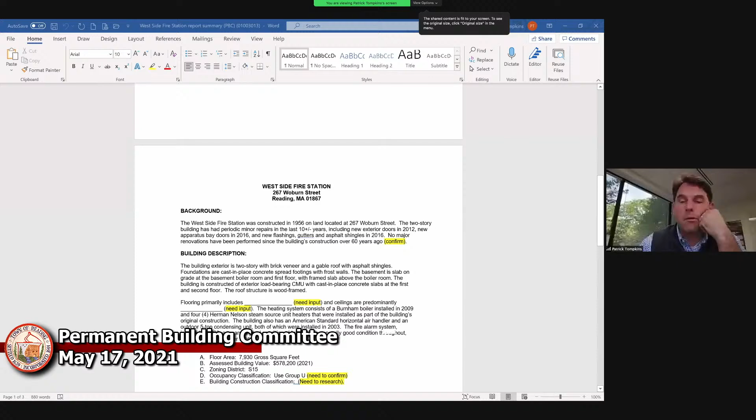Okay, I'll see if I can do the same. I think that's what we did the month before. Right. Bear with me a moment. Screen... sure I share the right screen. Okay, I have the narrative up. Can everyone see that? Yep.

All right, so the first page is pretty straightforward, and it's similar to the other narratives we've already read and approved, so I don't know if anyone needs to read through that. No. So moving down, I read through this ahead of time. I thought it was pretty well written and covered just about everything we wanted to cover.

There's probably just some sort of fact checking we need to do that we can do on the fly here. If anyone can open up the checklist or any other information while we go, or we can leave some stuff for later. I don't know if anyone else had a chance to read this ahead of time and confirm any of these.

Yeah, when I put this together, I was just using the notes because I wasn't actually there for the walkthrough. I had a mediation the next day, so I just did my best with the notes. And if I got anything wrong, certainly let me know. And then a couple of them, like the occupancy classification and the building construction classification, I just wasn't sure where to look for that, and I hadn't had a chance to find that information yet. So if anybody has any input or can point me in the right direction, I'm happy to close those loops. Okay.

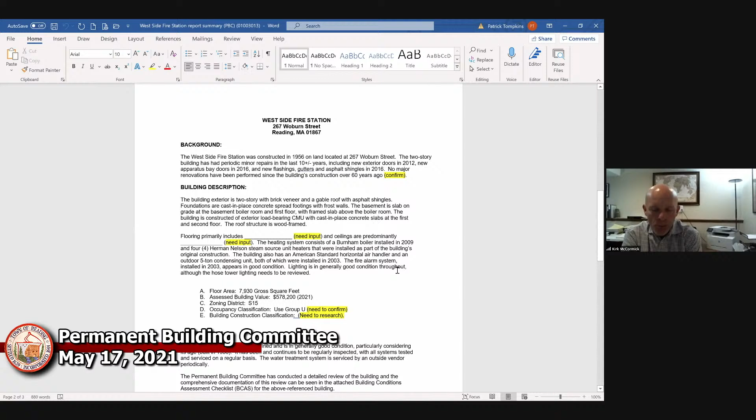So the first paragraph looks okay to me. I don't know if Joe and Kevin, if those recent renovations and things make sense to you.

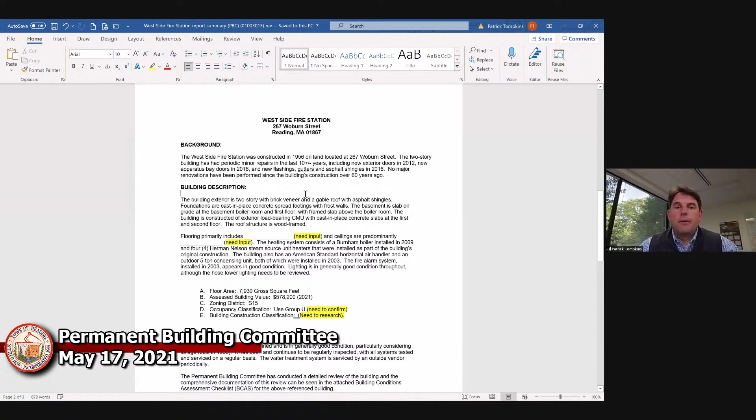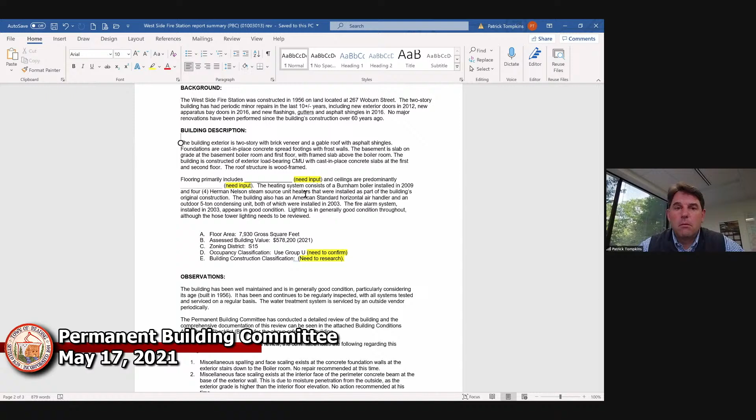Okay, just moving down to the building description. I don't recall what the primary flooring was, I think it was primarily resilient flooring, except for the apparatus bay, which is concrete. There was maybe some carpet in the upper floors. It's all VCT on the second floor, which was actually installed new in, was it '15, Joe? I mean, '16?

Might have lost Joe. It's the problem with these remote meetings.

So I don't know if anyone can read the edits that I put in as we went along. I think that pretty much covers it. There's definitely some ceramic tile in the bathrooms, but it's predominantly VCT. Those bunk rooms are all VCT, right? There's no carpet, and that was all replaced.

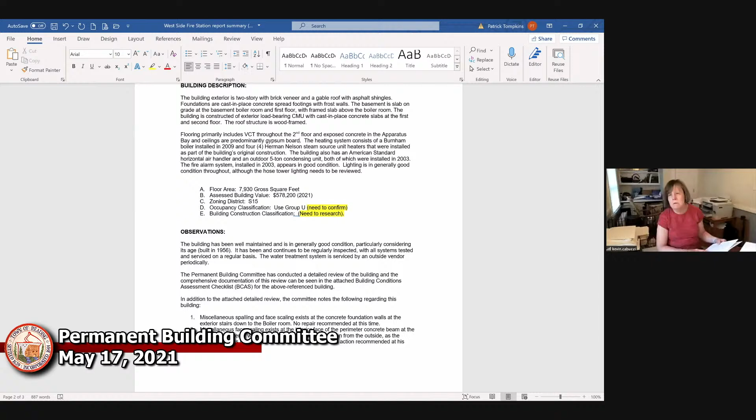I think it was '16 when there was the fire at the condo building there by the town hall. I'm drawing a blank on the name of it. It's the old high school building. Yeah, it happened around the same time. We had a flood on the second floor.

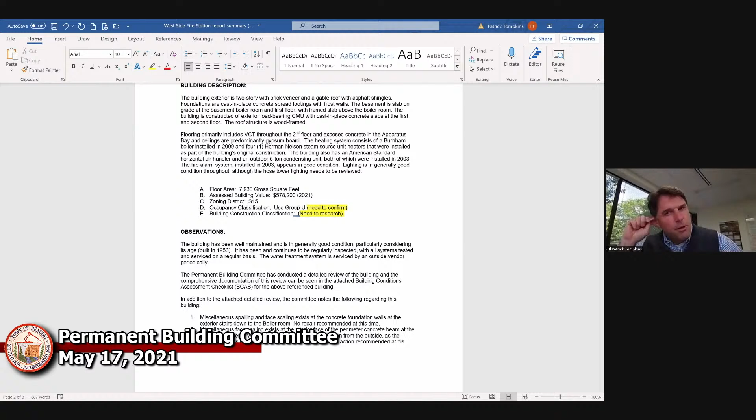Well, the ceiling's predominantly drywall. That's what I recall. Is that correct? That's correct. I believe so. I don't know if anyone else has any other comments on that paragraph.

As far as occupancy classification and building construction classification, we could kind of just do some research and circle back on that. I don't recall, if anyone has any comments on that paragraph. I don't think so.

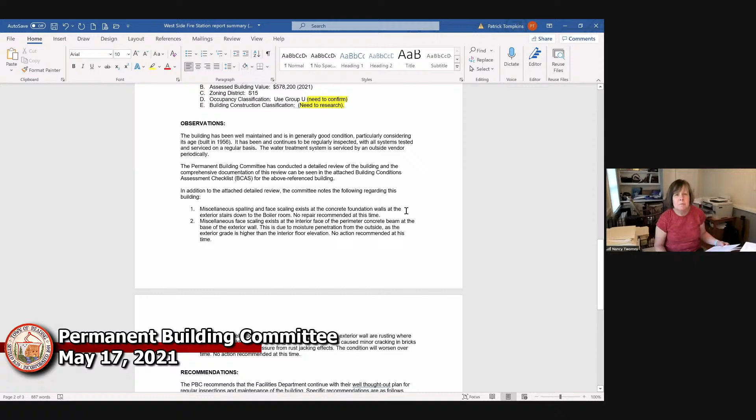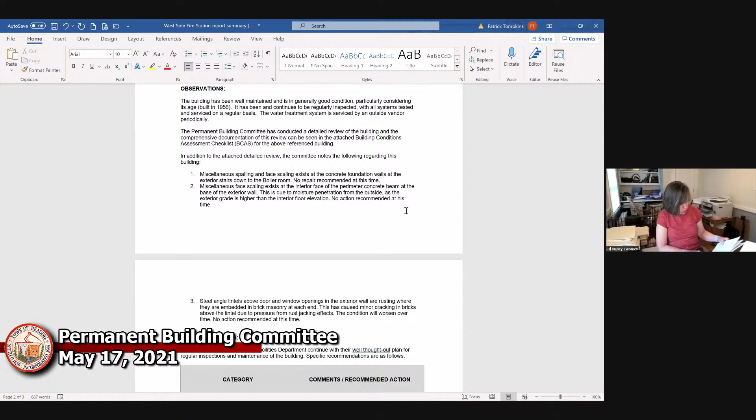Nancy, you could probably point Kirk. I'm looking for the occupancy classification. John can probably give us the building construction classification, but I'll look. Okay, if we come up with that before we close down, otherwise we'll just table it to someone to do that research and give it to Kirk or myself to finish this out. Or just tell me where to look. I just don't know where to look for it. Building code is where it is.

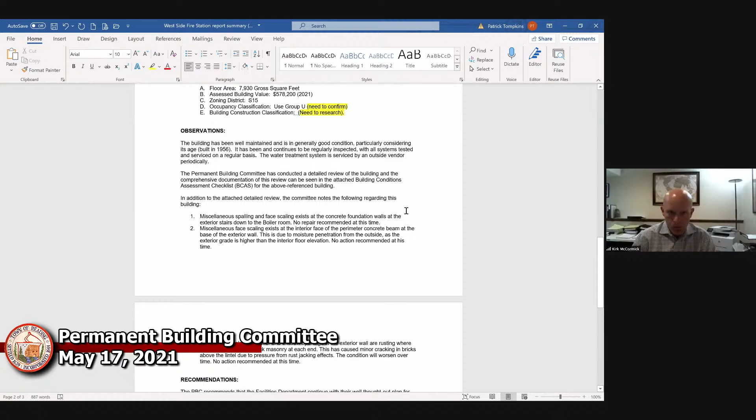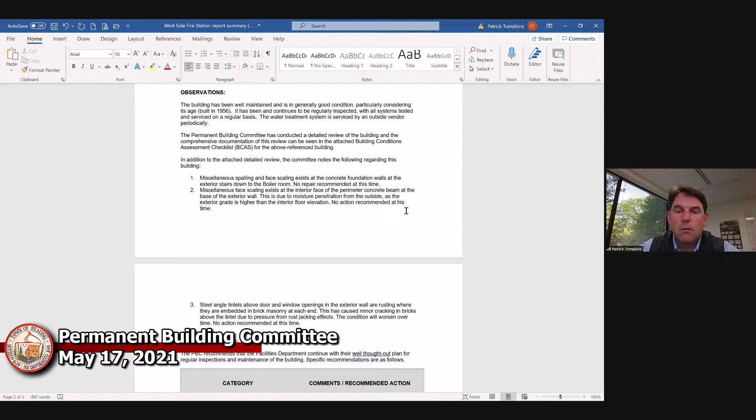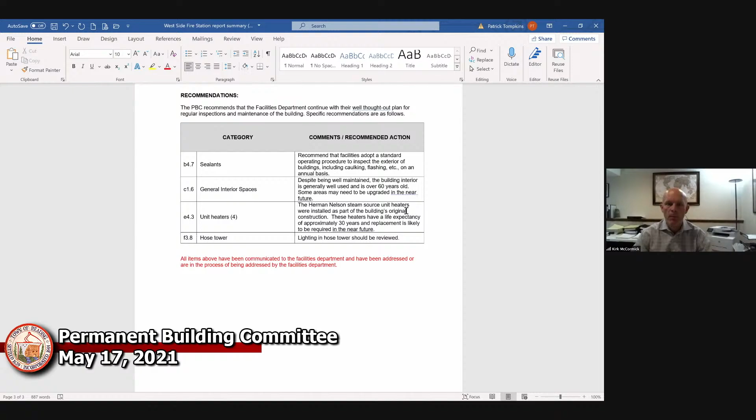All right, so we'll circle back on that, the observations. I don't know if anyone had any comments on the descriptions of the observations. I didn't have any changes or edits to the observations. Is everyone good with that? Silence will speak in the affirmative. And then the recommendations were just the items pulled off of the checklist, right? Right. So I don't think we need a vote or anything, but we'll just circle back at some point on the occupancy and the building construction classification.

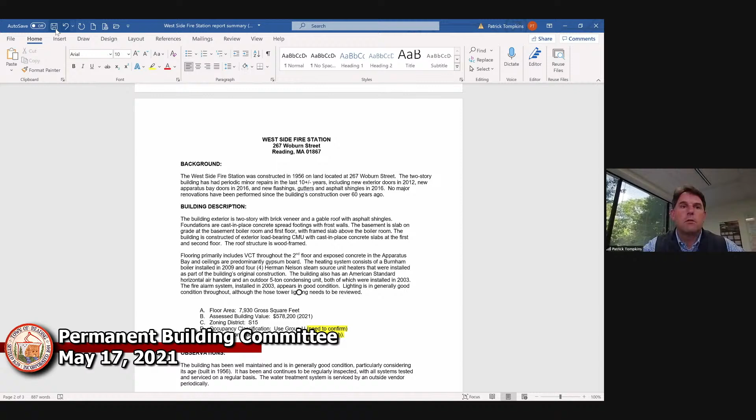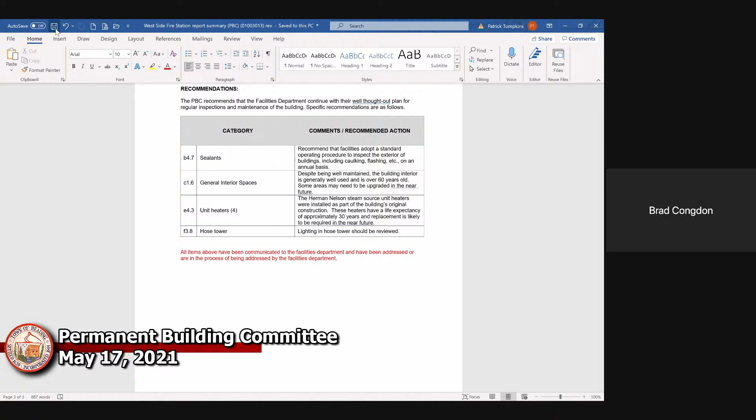Pat, as far as the actions, can you scroll down to those? Sure, sure. I don't know if Kevin or Joe have addressed any of these since we did the inspection. The first one's kind of a general one we use everywhere.

Well, our goal, one of our goals this year as a department is to put a sealant PM into School Dude, and we're going to have to bid that out to get someone to do that. We are going to be actively pursuing that this year, FY '22. So, second item.

I don't necessarily agree with number 2. That kitchen was completely renovated. Kev, when was that done up there? The kitchen was done in, it was like '12 or '13. It was completely done. And then again, when we had the incident there, it was during mutual aid coverage that was over there during that fire, and a faucet was left on and flooded that second floor.

We did all the flooring in there, which included a major abatement of the existing flooring because it was asbestos. And we also painted that place top to bottom.

I don't really see this item as actually belonging under the recommendations. Some of the areas I saw and recall, like the bathrooms, are 100% functional, but they're original to the building, like the tile and some of the fixtures. So it's tired, and we wanted to note that, but we didn't see anything that didn't function.

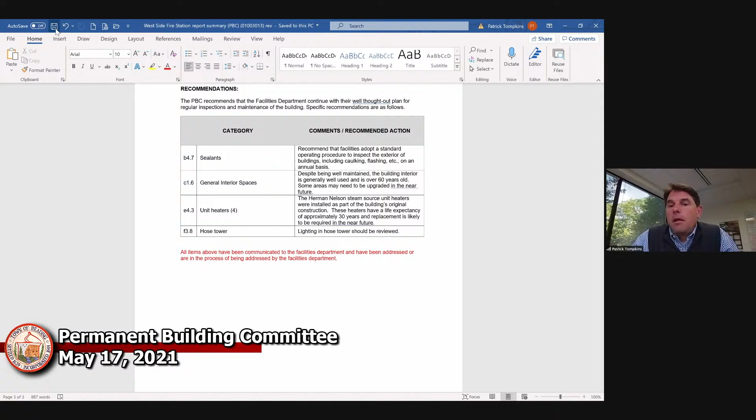I didn't see it as anything that we would recommend you need to do something. This was more from a capital planning perspective—at some point there probably needs to be some work. The building is, as far as we could tell, structurally sound, keeps the weather out, serves its purpose, and is functional and well maintained. But that was just something like the bathrooms had urinals that are probably original to the 1956 construction.

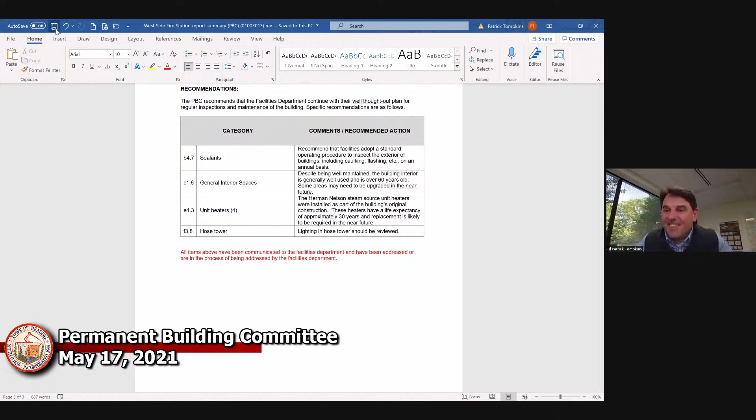And then as far as the unit heaters go, Kevin, any issues with those? No, they were all functioning. Yeah, we haven't had any problems with them.

Other thing to keep in mind, our capital plan is for any particular project that's over $10,000 in value. So if anything like one of those unit heaters was giving us trouble, we would take it out and replace that in our operating budget. So just keep that in mind—that's why you wouldn't probably see those unit heaters on the capital plan.

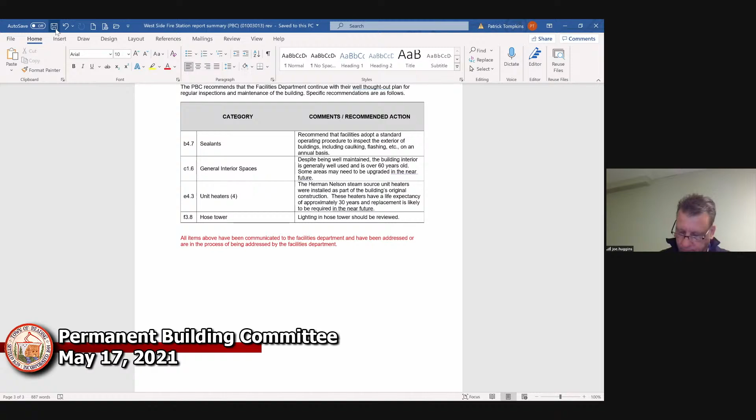Again, those are more things just to point out to make sure they're on your radar. The one thing that probably should be looked at is the lighting in the hose tower. That's probably worth looking at. Thank you, Brad, for pointing that out—we should make sure we're circling back to those items.

So Pat, on the use classification, it's actually mixed use. It has business B, it has a little bit of residential because they're sleeping there, and it has storage for the garage bays. So you could say mixed use B, R, and S, but I could get more specific on all of those.

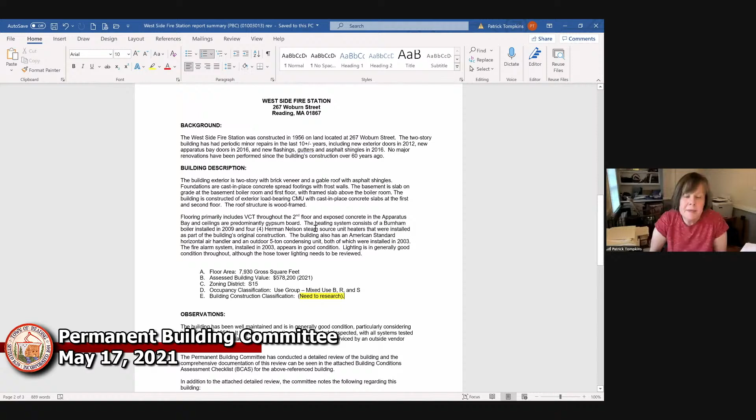All right, so we'll circle back on the building construction classification. Yeah, that I'm not sure. Does it have a big assembly space too? It has a big meeting room on the second floor that is open to the public. Yeah, I'll look at it and see—that might still be under B because it's probably educational use. Anyway, I'll double check. All right, so I'll save that.

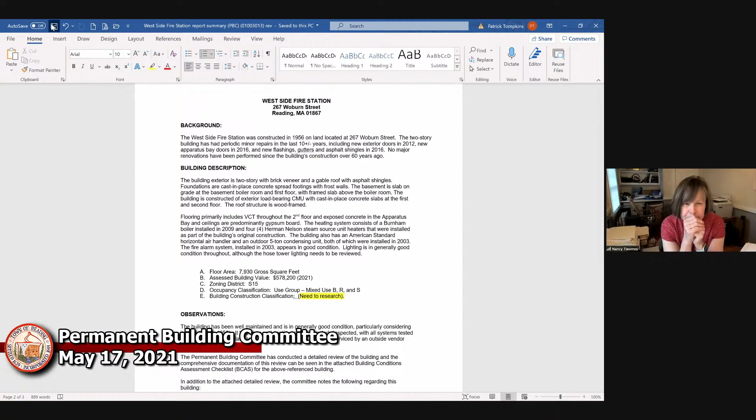The next item, and I know we've got everyone here for the water tower project, which I put at the end of the minutes because I know it'll probably take the longest time. But before we jump into that, Joe, nothing in particular, but could you give us a quick update on any ongoing facilities projects, and also if anything's been done on the MSBA submission.

So as far as the MSBA submission goes, it's due on June 25th, and the school department is preparing the SOI right now for the Killam project, if you will.

There were others—on the accelerated repair program, we were contemplating maybe putting in for the boilers at Parker Middle School, but because they're less than 25 years old, they don't meet the criteria. That also goes for the roof at Parker Middle School, which is a project we're looking at—we're going to go into design in the next few months and hopefully have that out to bid next year. But again, less than 25 years old, so we wouldn't even qualify.

So the big one is the SOI for Killam, and John Doherty has done a lot of that work. It was captured in the enrollment study and past SOIs we had done when we took advantage of the new roof over there. So we have a lot of the information through School Dude and other projects we've attempted to get invited in on. I believe it's a 6-month turnaround to hear if you get invited in. That's what we're hearing.

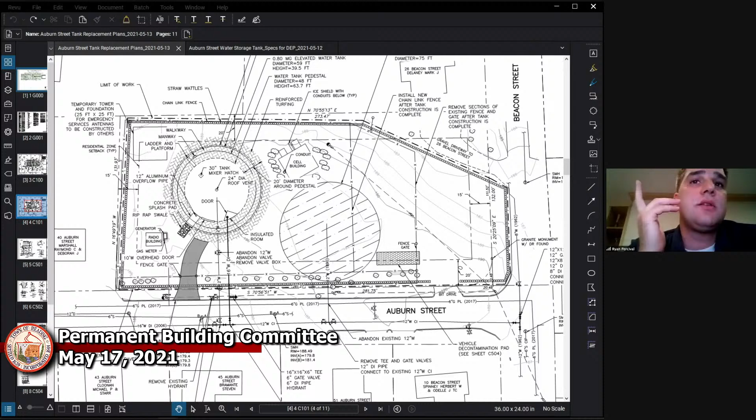We had a possibility of putting the antenna on the easterly side of the site. That was not well received during that conversation, and this is what the final decision led us to for the location for the RFP. So, ideally, I'd like to have the thing completely off-site, have more room, but that's not an option for us. So we will have to design it in such a fashion and construct it in such a fashion to take precautions for that.

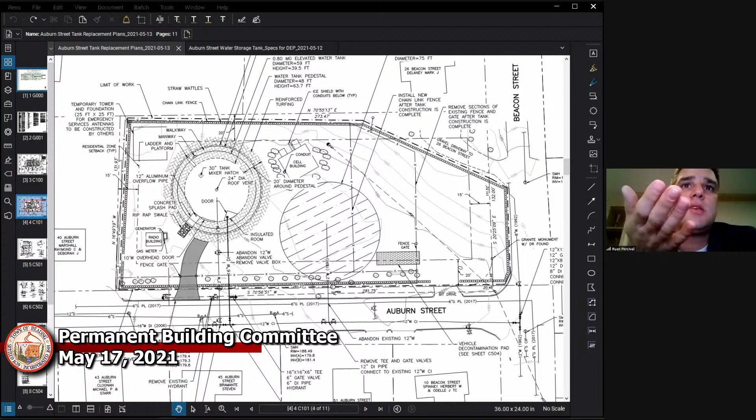Okay, I mean, I share your concerns. I just, you know, we are stuck to a shoebox size lot, and a lot of things going on at that site. Well, not really—it's not that small a lot. It is that small when you're looking at the construction of the site. We have a laydown area that takes up the diameter of the size of the tank because that's how big you need to have it for the pan. And then you have a large size crane on site also trying to move and pick that and put that in place. So it is a tight site.

It's not open by any means. Well, obviously Weston and Sampson are going to have to be fully aware of whatever limitations there will be in terms of excavating close to the ballasted foundation, and you may have to do some soil support. None of these decisions have been made in a bubble without consultation to Weston and Sampson and the carriers. Ideally there would have been some better locations if it wasn't on site, or as far off to the easterly side as possible, but that was rendered not ideal during the CPDC process. So this is what we're left with in the site that we have to manage.

Quick question on logistics and space on site. Where will the crane sit to hoist? Will it sit so, because you've got the laydown area, and then obviously you're gonna have to pick that and put it in its permanent location. We've had some conversations with tank constructors, and it can come in on their easterly side and get close to that laydown area, depending on the size crane they have. It could also possibly pick from the street. With the size crane they're using, I'm sure their reach will be big enough from the street.

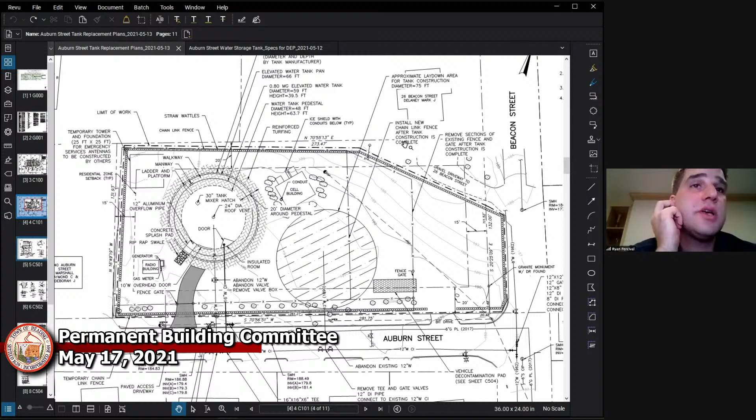Since it's entirely funded, paid for, and designed by the carriers, it was left open for their design on what they felt they could put in that footprint. I've put up a 150-foot tall monopole before, and we used either a 12 by 12 or a 15 by 15 foot concrete foundation, so it would take less footprint - you wouldn't be as large as 25 by 25.

I understand. When we were speccing this out for just the town's 911 equipment, we were going to use rock anchors and have a foundation, but we did not give them a design. So it quite possibly could be a ground foundation, rock anchored foundation - we don't know yet, we haven't received them.

Okay, thank you. Ryan, this is Greg. I guess, and it's too late at this point, but just to rephrase John's concerns differently: if whoever responded to the tower RFP knew the limits of the excavation for the water tank, they could design a foundation for the monopole that took into account the close proximity of that excavation. Instead, we have it going backwards, where we're going to allow the tower RFP respondent to build whatever foundation they want, because they don't know the constraints or limitations of the foundation design and construction methodology for the water tank foundation. So it's going a little backwards.

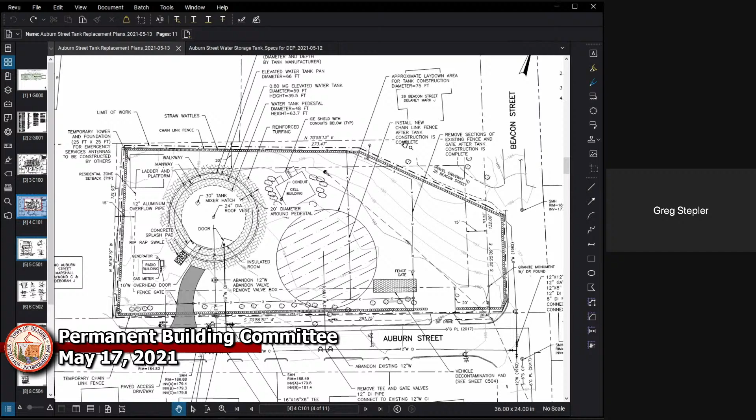You cut out, I think we might have lost you, Greg. We kind of missed the end there, Greg. Are you still with us?

So I think what he was saying, it's going a little bit backwards, tail wagging the dog. I don't know if there's anything, as we talk through this, if there's anything you want to include in that RFP.

You don't have the water tower foundation designed, but I think Weston and Sampson has a pretty good idea of what they expect the design to come back with. And if nothing else, we could make sure in the next week through an addenda that we communicate as much as humanly possible to whoever is responding to the RFP on the temporary tower.

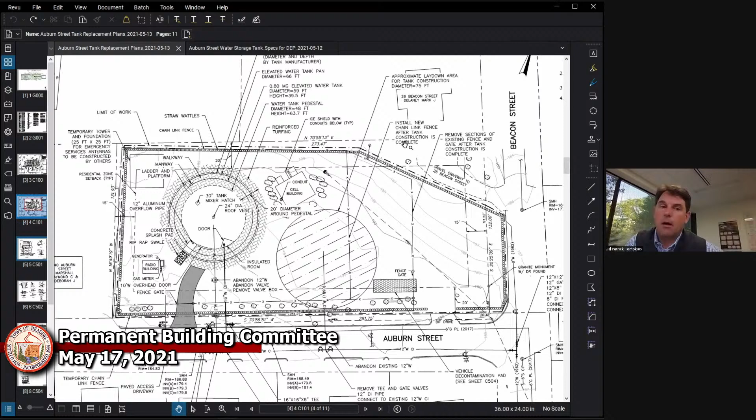One question I have, does that RFP include putting in the foundation, the monopole, and swapping over the antennas? Yeah, so it's really tricky because we can't specify who gets to go on that monopole. What we can only specify is that it shall be a minimum of 2 carriers, and it shall have space enough to accommodate all of the 911 and facilities equipment.

So there's a few scenarios that could happen. One, the likely scenario, would be that the carriers that are on the existing tank are the ones that put together a bid and send it in, and they swap over their own equipment. The other one that could happen is a third-party tower installer could come in, put a bid in, construct it, and then charge whoever they want for space on that monopole.

So it's not entirely 100% that the carriers that are on the existing tank will be the ones that are on the monopole. It's likely, but it's not 100%. We won't know that until we open up the bids on the 27th and see where we're at. But that's the scenario that could happen.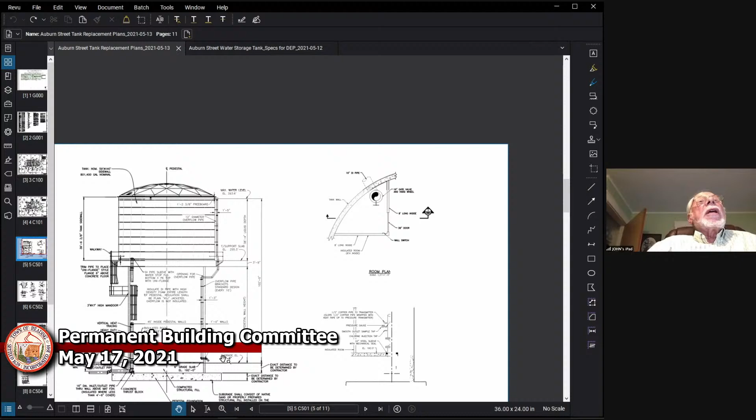You look on their section, they're showing it 2 or 3 feet bigger in radius from the center than the face of the steel tank. It's not to scale, but I see what you're saying. What I'm saying is it's likely, in my view, to be even larger than that, because this tank has huge seismic forces generated on it, and you've got to have a big foundation.

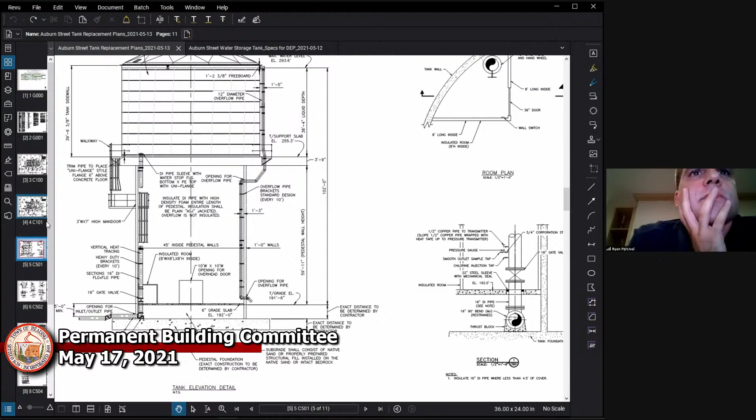So I'm saying that the distance from the edge of the 25 by 25 ballasted tower to what is shown on Weston and Sampson's drawings for the base of the steel tank is about 8 feet. And since the foundation is shown on Weston and Sampson drawings larger than the size of the steel tank, the excavation for the foundation is going to be closer than 8 feet, and it's going to be 11 foot deep.

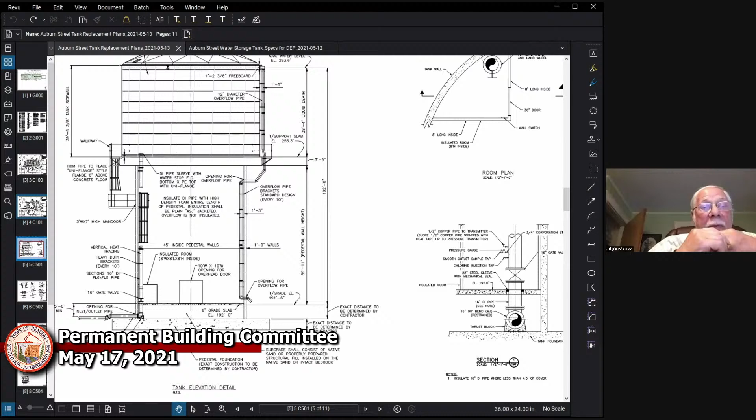It's a problem, but Weston and Sampson are the engineers advising you for both the temporary communications tower and the water tank, so let them solve the problem. That's what you hire them for. I'm just pointing out there's a potential problem there. Understood. Yep.

Can you guys hear me now? Yes, yes. Yeah, so I'm not sure when my thought ended, but it sounded like Pat rehashed it for me. But the other observation I was going to make to John's point, or at least my own part of John's observation, is...

Letting CPDC and the neighbors dictate where a temporary structure is going to go has significant impact on potential cost. Maybe, and I know it's not your issue, Ryan, but a little foolish in my opinion if we end up having to do expensive SOE or drilled and grouted mini piles to tension the base of a temporary structure. I could see a lot of dollars and cost overruns related to making these two structures coordinate with each other when it could have gone in a different spot and worked as a ballasted foundation like it was intended to.

Ryan, one question on the RFP. The entity that constructs that foundation, designs it, constructs it, builds the monopole - do they remove it, and do they own maintaining it during the course? Yes.

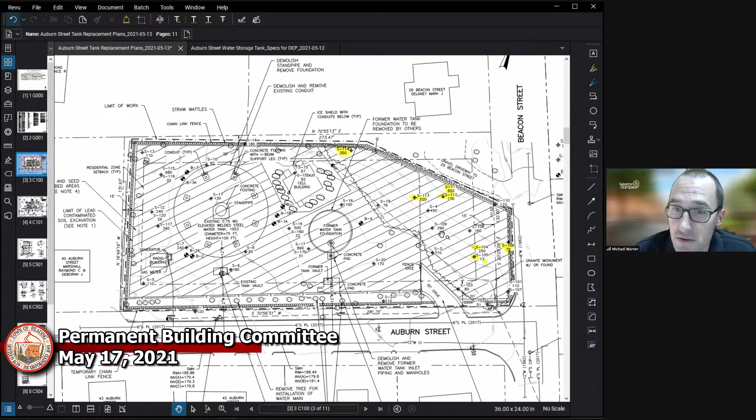That price was 2017 or 2018, Mike? Is that about right? Yeah, the last one that you utilized. Yes. So town meeting will be aware that this is 2018 coming in front of them, so hopefully it won't be a big escalation.

Now, how would you manage that with a July 31st bid opening? The bid is probably good for 30 working days. We can ask the bidders to hold their bids for a period of time, as long as it's in the bid requirements—that's what they have to do. If there's enough money to take on the project, we should be fine, and then we could go back to town meeting to supplement the shortfall.

Graham, could I ask a question—if we had been involved in the project earlier than we were, which we should have been, but we weren't—how was it determined that we need a water tower of the particular height shown on the drawings?

Were there hydraulic calculations done? Yes. We couldn't live without a lower height? Yes, we've done extensive hydraulic modeling. We've been at this for several years, and this is sort of the final step. We've done countless hydraulic calculations, modeling with Weston and Sampson and the MWRA when they were doing their Northern Intermediate pipeline that came through with the 36-inch line.

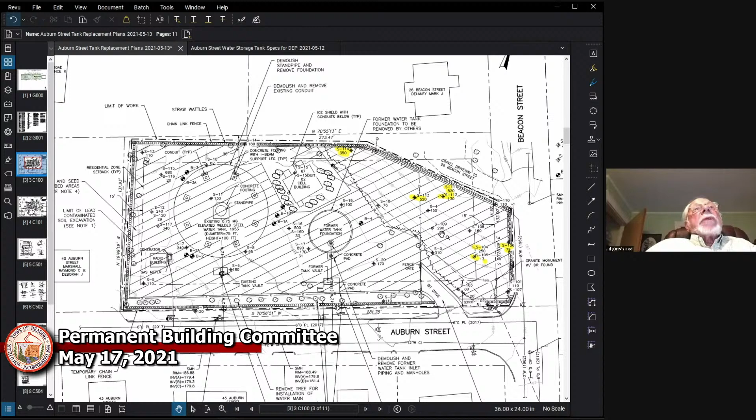Ryan, just quickly, circling back to the drawings that you sent over, we had a few comments. I sent them over to you this afternoon. I wouldn't expect a bunch of answers within the last few hours since I sent them to you, but just wanted to circle back on that. I feel like I should have reached out sooner to get the plans. Going forward, if you're at a point where you have a product that you think would be good for us to provide input on, send that right over, and you don't need to wait for us to ask.

Yeah, I think we were stuck in that town meeting cycle there, which I was at all those town meetings too. So it just, when we kept pushing it off, it wasn't on my radar for a little bit, but we can. Yeah, I kind of felt like I dropped the ball following up with you.

But we can send these over anytime we make a change. It's as easy as sending an email. We can send them over to you when we hit a milestone or make a major change, for review. That's not a problem at all. Yeah, I think that would be the best thing, not every single change, but at decent milestones.

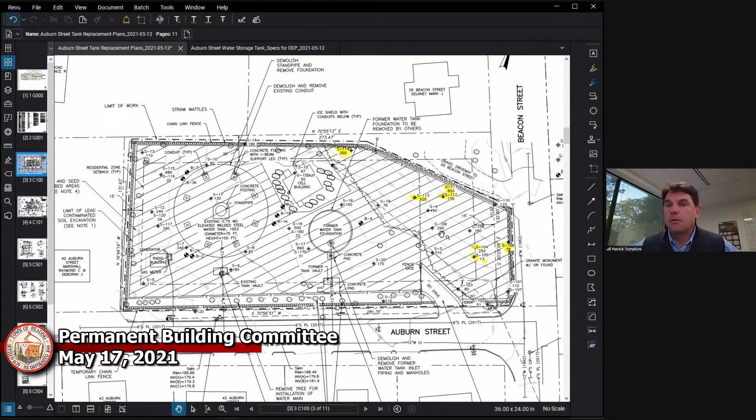Yeah, so there's a set with DEP now, which is very similar to this. The only thing different from what we sent you on Wednesday or Thursday of last week was the pipeline in the street - I don't know if you were focused on that piece, but that was the one change DEP had seen. Outside of that, Mike, nothing's really changed with the plan set, correct? This is the most up to date.

Okay, yeah, and we're still in the process of developing the bid package, so you'll get that for review as well. What I would say with the plans we have - we got those, and I probably sat on them for a day before I got them out to the team, and we provided some comments.

But some people may not have had a chance to look at those yet. One of my comments was, when do you really need feedback from us on those plans? Because I skimmed through the specs, but I didn't read them all, every word. I may get a little closer to that if I have more time. I'm not gonna dive into every detail, but there were some things I wanted to dig into a little deeper. So is there a time frame?

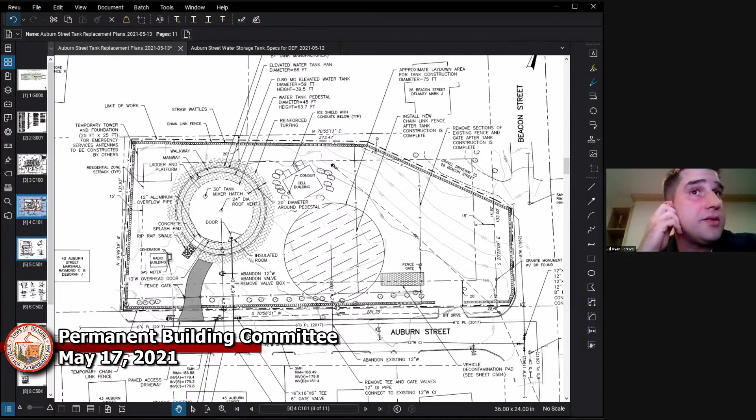Yeah, we can also - I think we had answers for a majority of those questions. Mike and I had talked briefly, so we could probably provide a response to those questions and shoot them back off to you in an email format. That way there's open communication - you're sending your comments in, and we may have answers to those immediately, so we can just respond and send them back. So if you give us a few days, we might be able to draft something up and respond to those comments.

That'd be great. Even if it is - yes, that's a great comment - we'll have to look into changing something, or if we have an answer for it, we'll put an answer in there. Okay.

I will say that the measurement and payment and the bid form were still kind of works in progress a little bit.

So as far as providing comment on the plans by mid-June, I think as we get closer to finalizing how we want to bid this, how we want the bidder to respond, and what we're going to include for quantities, we should provide another set of specs and keep a log or tabs on the major changes. But those were things I was still wrestling with, and we needed to get something to DEP so they could start reviewing it.

So I'm looking at the specifications. There's a bid form question. Like Ryan said, we can provide something and we'll touch on that and revise and resubmit.

Yeah, that's fine. I assumed a lot of the front end stuff was preliminary, but sometimes you're not sure. Right, Pat, now that we know we're pretty close to the site, this is when they start diving into the specs, the measurement and payments, and things like that.

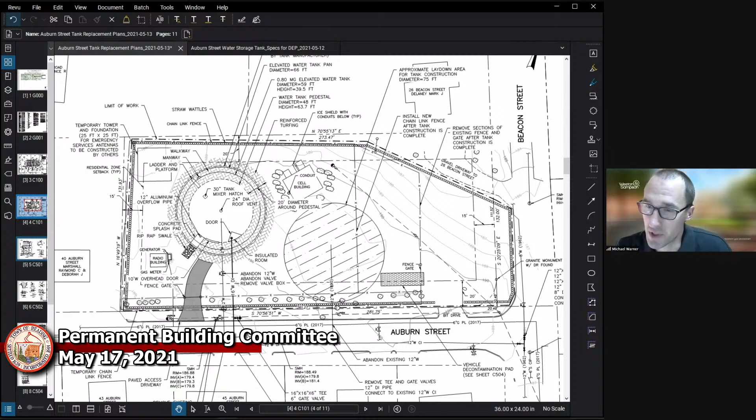So who would make a determination or suggestion as to color? Are people just giving their personal opinions, or do we have some kind of expert here, a landscape architect, something like that? It will not be me, John. Well, I will not be choosing that color either.

There's got to be a rational reason for spending money changing the color. I personally don't see the reason for changing it. I think standard colors are usually standard for a reason, because those are the colors used most often. In particular, one manufacturer has a cobalt blue which I think looks nice, but I'm not an expert.

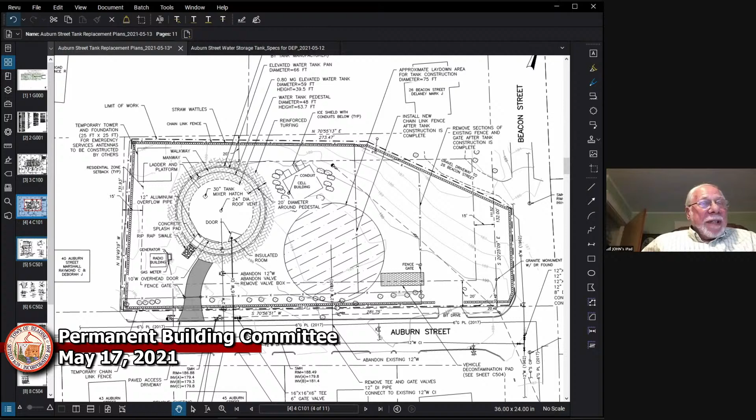But I think I'm calling for an expert opinion as to why we should be talking about colors. What's wrong with that process is that it involves the public. So the public, when they come into CPDC and make suggestions, and CPDC asks for us in their final decision to make a consideration for a color change, we have to adhere to that to the best that we can. That's in the final decision.

So that's just another board process that we went through. That may come up with the select board at some point, that body - maybe they can make the decision.

I've had some experience of people going to a public meeting for a bridge out in Williamstown, and somebody standing up in the audience says, I want the concrete to be not the standard concrete color, but the same color as a bridge like 50 miles away. Can you go see that bridge and produce concrete of that same color?

For no rational reason. If we're going to talk colors, there's got to be some rational reason to prefer one color to another. I haven't heard one yet in the public forum, just basically, I either like that color or I don't.

Because bid alternates are always a problem. I mean, not always a problem, but often they are a problem if you have alternates. So that's what Mike and I were struggling with.

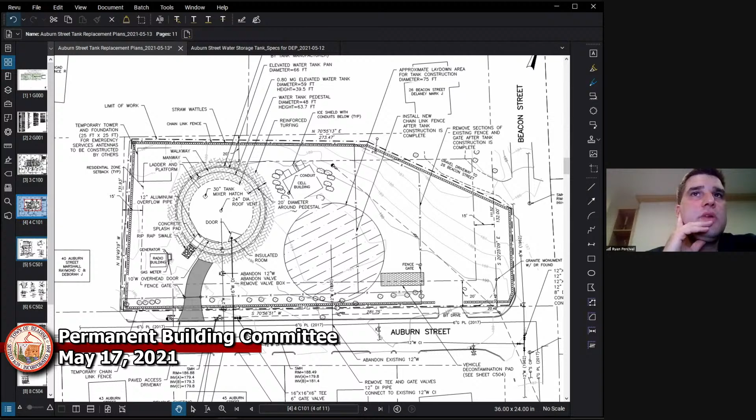Unless anyone else has anything else, I'll entertain a motion to adjourn. Our next meeting is June 7th. Did we want that to be a deadline for comments? So what's today - is that two or three weeks? Three weeks, I think, because the 31st is a Monday. Okay, that I'd be fine with. We'll try to have any comments to you prior to that meeting, and we'll put you on the agenda for another update. That'll work out, it'll give us some time to get responses and keep this conversation going. Thank you, Nancy, welcome. And a reminder, we have a meeting in three weeks, not four or five like we normally do.